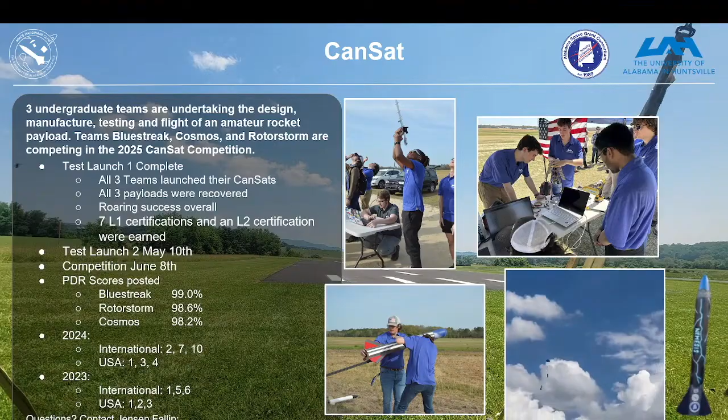They're working on this really cool subsonic automated plane. It's called SPAROW, and they're working on their first working prototype.

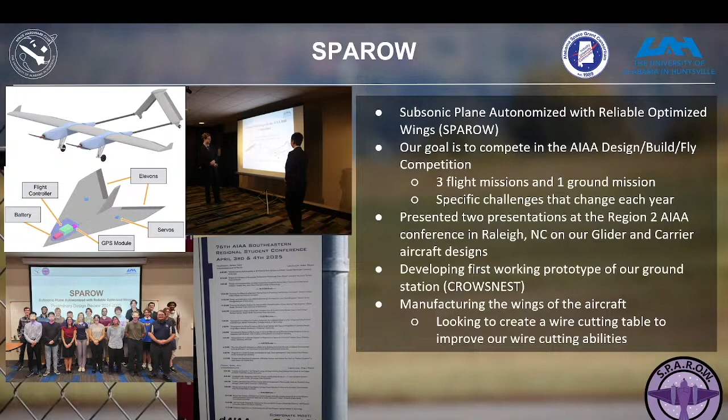They're actually doing a competition, manufacturing the wings of the aircraft, and looking to do a wire cutting table to improve their abilities, but they're also working on all these little drone projects too.

This is called the Space Hardware Club BalloonSat program. One of them we did from Antarctica - I showed you those slides last year. So that's what it's like down at the bottom to launch a balloon in Antarctica. You don't have to worry about trees, but it is a little bit cold. That was the warmest day of the year we launched there, and it was 28 degrees.

Above zero. Yes, yes. This is the HAVOC payload - I'll talk a little bit about that. It's called High Altitude Visual Orientation Control. The HAVOC project has the goal of developing and researching hardware capable of stabilizing its direction and rotational velocity within the stratosphere, and they want to enable that for stable video.

How many of you attended GPSL two years ago in Huntsville? They actually showed this payload operating. They would spin it and it would immediately snap back into place. It's really, really a cool system.

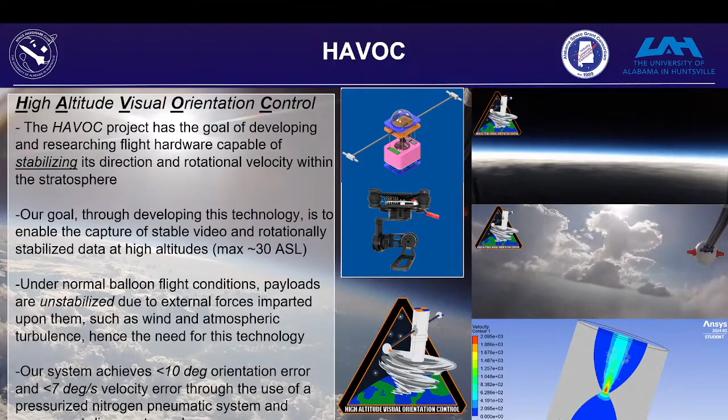Under normal flight conditions, they were able to achieve a less than 10 degree orientation error and less than 7 degrees per second velocity error through the use of a pressurized nitrogen pneumatic system and convergent to divergent nozzles. If you remember the Gemini program, when they did spacewalks they had a little air jet control - it's handled in kind of a similar manner, and it really works pretty well.

Now this is one they're currently working on. How many of you have launched a balloon that came down in a 1,000-acre field with one tree in the middle of it, and it lands right on top of that tree? Wouldn't it be great to avoid that tree? Or the mountain? Or a lake? Or someplace that's pretty hazardous?

Like one place I landed in was a swamp in South Carolina. Before I walked in there, they warned me: before you go in, I want to warn you, it's filled with alligators. My payload's still in there - so I did not go after that one.

And we had one balloon land in Texas that I was riding along with, and it was way up in a tree in a private hunting preserve. Had we had the ability to steer it, we could have avoided that preserve. But instead, we had some discussion - well, it's right on the edge, let's go get it. I think we should probably ask permission first.

Well, the guy came in his utility vehicle with a big shotgun rifle in the back and said, I can get that down for you. We went out there in his utility vehicle, he pointed that rifle, and in one shot - the payload string was 100 feet high - he was able to sever that line with the first shot, and everything came down. So it was a very good thing we asked permission first.

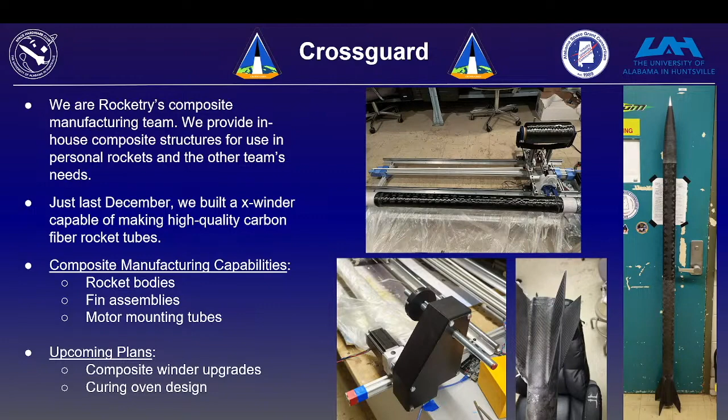They also have a rocketry program, and they do a number of competitions with various goals. You can see there's all kinds of stuff they've been doing, and they actually get their amateur rocket certification through this program. They're working on making different composite materials for rocket bodies, fin assemblies, and the motor mounting tubes, so they're learning how to do composites as well.

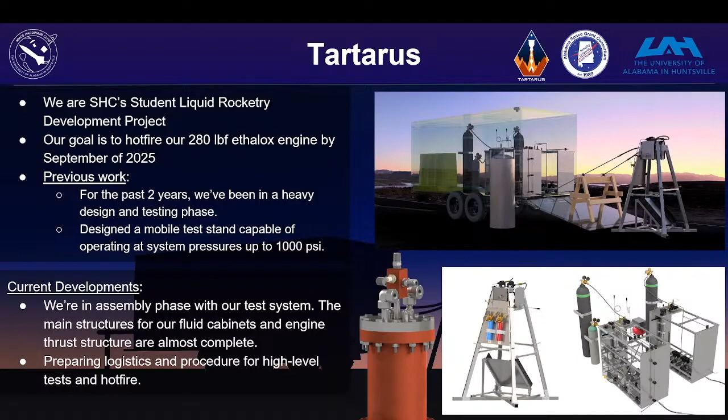And there is a rocketry project for the Spaceport America Cup, called Elysium. They have to build a rocket that will go to 10,000 feet, but you cannot go over 10,000 feet - so they have to get as close to it as possible without going over. They're also working on a liquid rocket engine project as well. So it's a very ambitious group.

Any questions on activities of the Space Hardware Club? Yes, Jim - how do they finance this? Space grant, NASA space grant, and private funding.

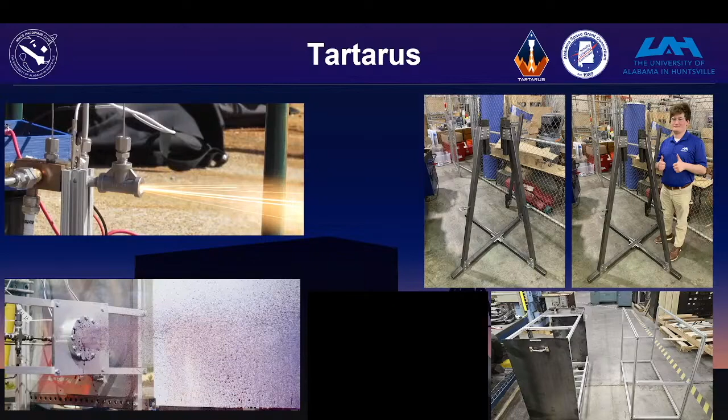On the solar balloons, is there any validity to doing a hybrid where you have enough gas to kind of keep you aloft - does that have any advantages? That's a good question, that might be a really interesting way to do it - just be neutrally buoyant and allow for something like that. Typically these are not sealed off, not super pressure. What I have heard is that if you use pure black trash bag material, when it gets up to 60,000 feet it actually melts the material - there's that much heat it collects. So it's better to have polyethylene, high quality like broadcloth, with carbon black on the inside - that works a little better. But there's all kinds of people flying these, just a tube of trash bags or big leaf bags taped together will take off.

And actually carry enough to carry a small payload. With that, I'm going to go to the next talk. Yeah, you can just escape out of that, and the other one I think is already loaded.

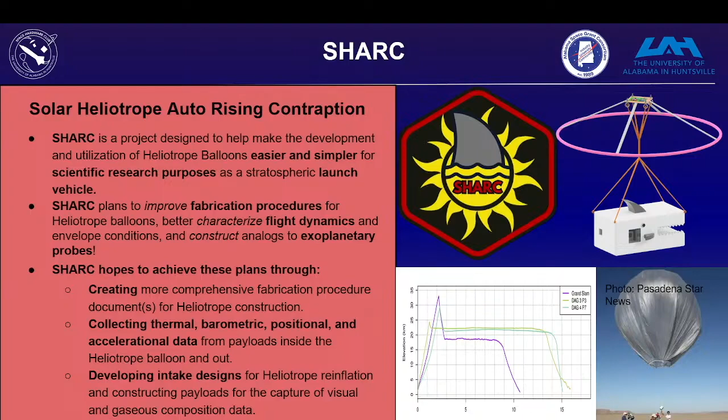Hey Bill, what is carbon black and where can I buy it? I'm not sure where to buy it, but maybe a paint store. It's lamp black or carbon black, real fine carbon powder. They probably use it for different paints.

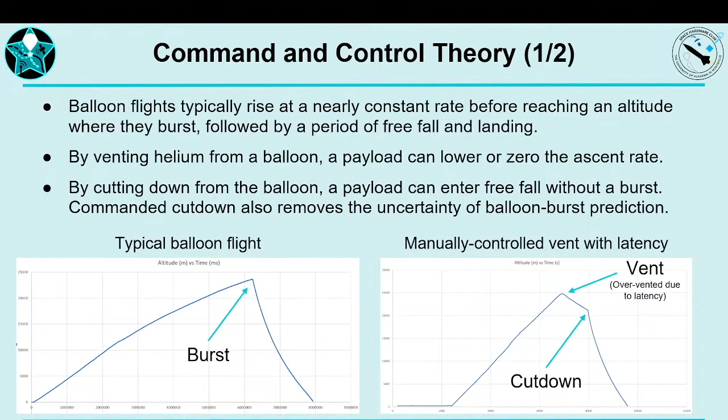So they were testing it by venting until they start coming down, and then after a certain point, they hit a cut down to come down in a normal manner. And it does affect where you're going to land, so you can actually choose your landing site by doing this method. You can control the landing zone with some degree of accuracy.

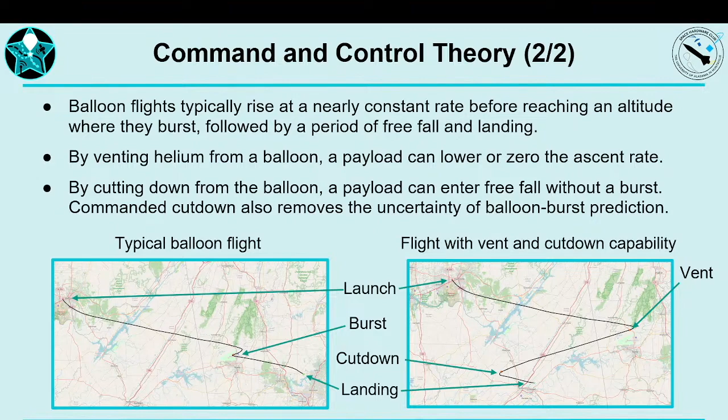So in other words, instead of just cutting it down and hoping for the best, you can give yourself some latency time to choose a good landing spot and have it drift far enough to really improve your chances.

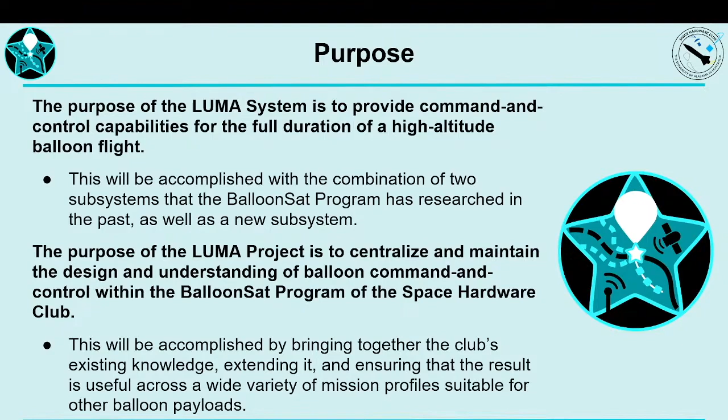So they want to centralize and maintain the design of their communications for the full duration of how people are going to fly it.

And eventually, we're going to be bringing down the balloon completely intact with a final adjustment using a vented ducted fan system. So you'll end up with the balloon. I don't know if you could reuse it much after that, but it's possible.

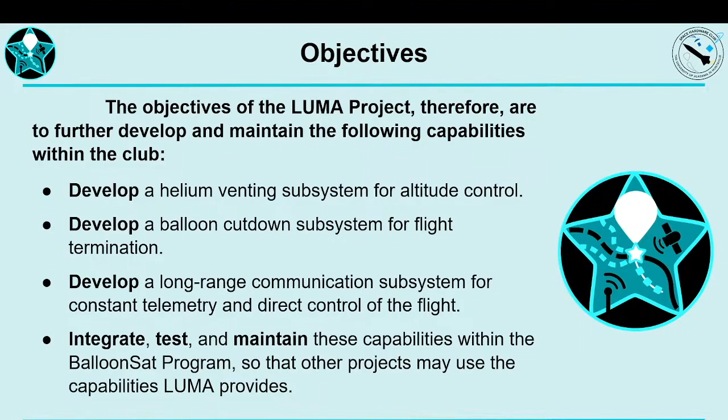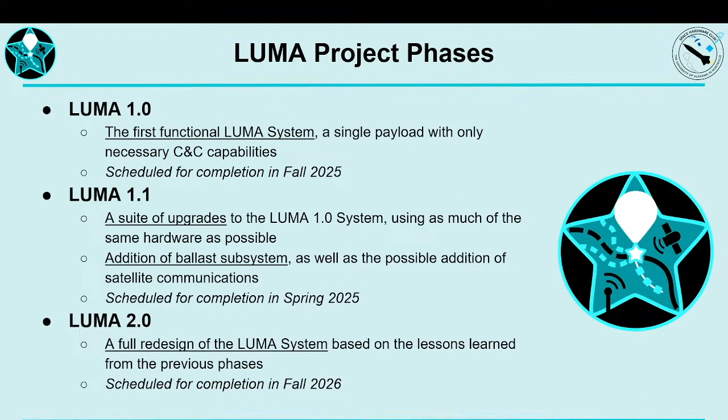So we've got basically the experiment and the cut down system. There's a lot of slides here, so given the time allotted, I'm going to skip through some of these.

So this is what their plan is, to let it go up normal, float, and then cut down.

This is their first smart balloon, the one I told you about that actually took itself off. It was pretty cool to watch because it just sat there venting liquid out of it, which was alcohol. They had a container of alcohol and it just started dropping alcohol until it actually took off. You could just sit there and watch it, and this balloon actually launched itself.

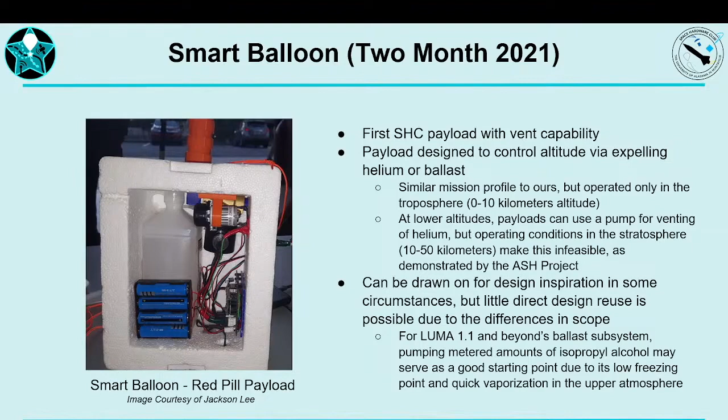So first, they used a drop designated release of payload, DROP, I like that acronym, and they flew this several times successfully.

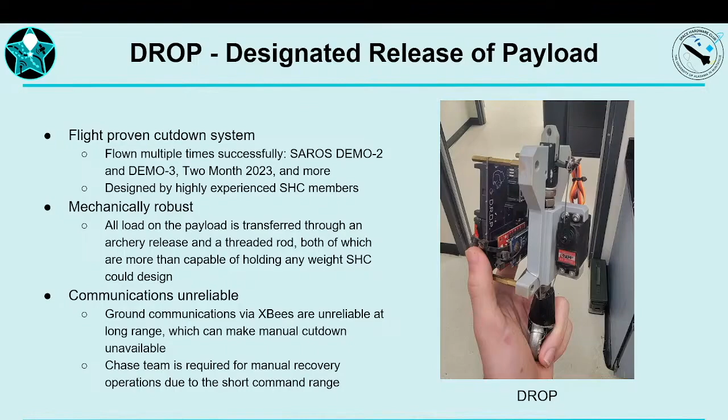And they used some XBees. I've actually had a 915 megahertz, 100 milliwatt XBee, and I communicated directly to a balloon 20 miles away. It is possible to do with high gain antennas. That's a 915 megahertz system.

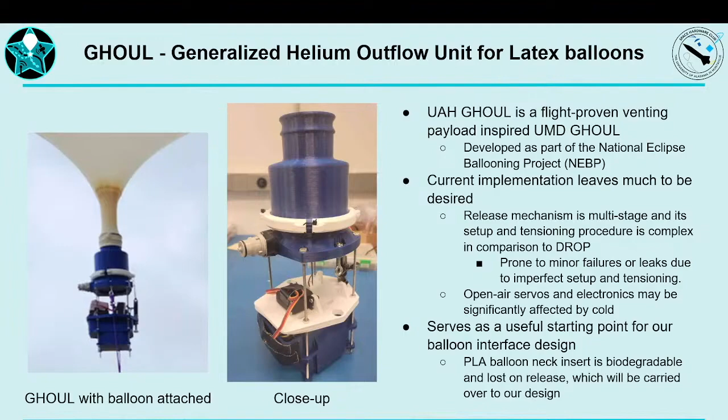So they've got this helium outflow unit. It's a vent that was developed as part of the Eclipse ballooning project. It looks complicated, but it's actually pretty robust in how it works. One of the problems you have is getting the lifting gas out in time before the balloon bursts.

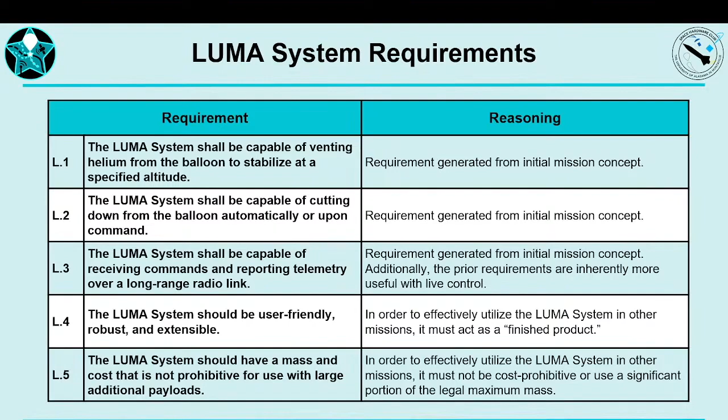And when you get up high enough, if you get it too high, it's hard to get the helium gas out. I think it's right around 26 kilometers where you're really going to have trouble getting enough helium vented to stop the ascent. So a lot of these flights, we did these tests at lower altitude.

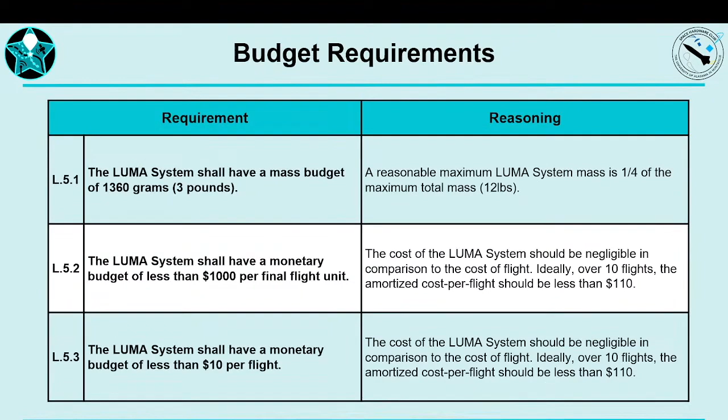Okay, so here's an example of the payload design. The core serves as the brain of the payload. They have a primary flight control unit which allows for the venting of the balloon, geofence flight termination, and they had the LRC communicate with the ground station to relay flight data and updates to the flight profile. You could actually send a different flight cut-down profile directly to it, rather than have it go with the profile that was loaded in the machine.

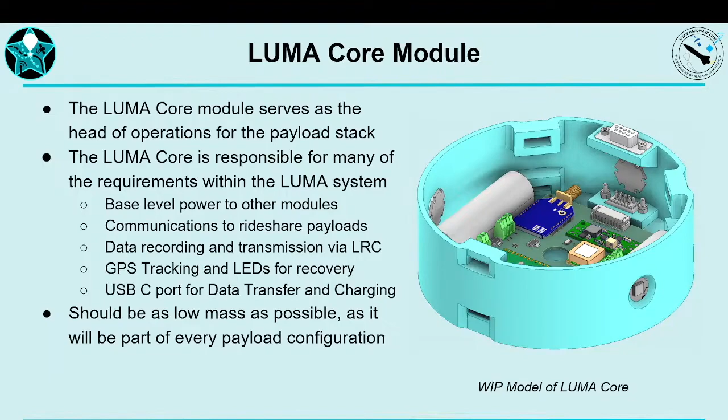There's an example. You can actually see one of the XBee modules that communicates between the modules. The XBees work pretty well for inter-payload communications. But like I said, you can get some pretty serious range on them.

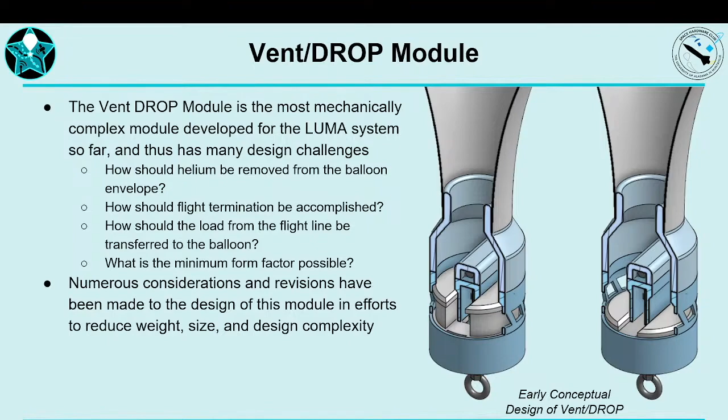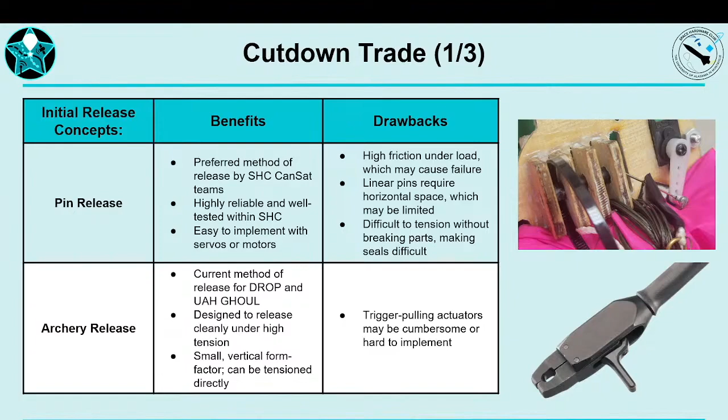So this is another view of the vent drop system. How many of you have used the archery release as a drop cut-down mechanism? Has anybody used that? It actually works pretty well. That's a standard archery release, and they incorporate that into their cut-down mechanism.

And there it is. The jaws hold on to the top payload, and then we have a servo come down and flip the trigger. There's not a lot of pressure needed on the trigger, and it'll open those jaws. It seems pretty reliable, and they've had good luck with this.

It's worked in several of their flights that they were testing for this release mechanism. What operates the servo? That's commanded by the uplink command from the XBees and the flight computer. Sometimes it's just based on an altitude limit that they preset.

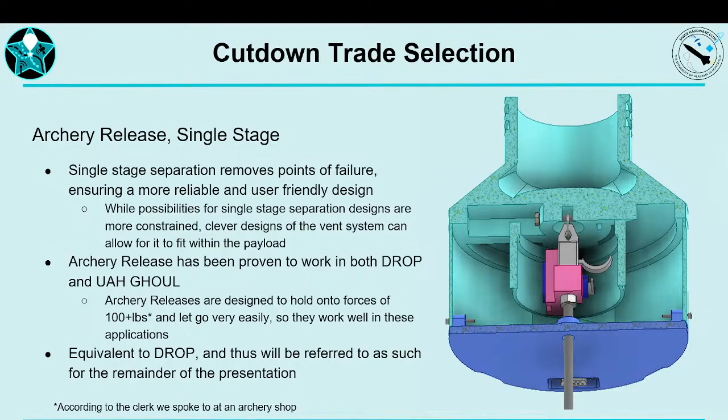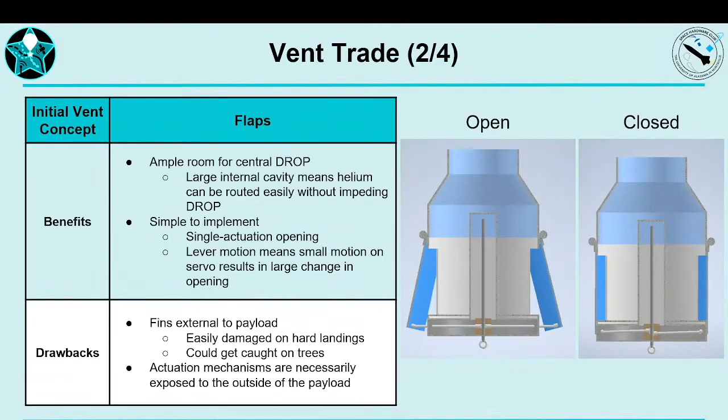Now this is the ventilation system that they're working on. They have open and closed flaps. These are a couple of the concepts that they worked on. They had a helical venting arrangement, a flap arrangement, and a plunger arrangement. So these are all the ones you can see.

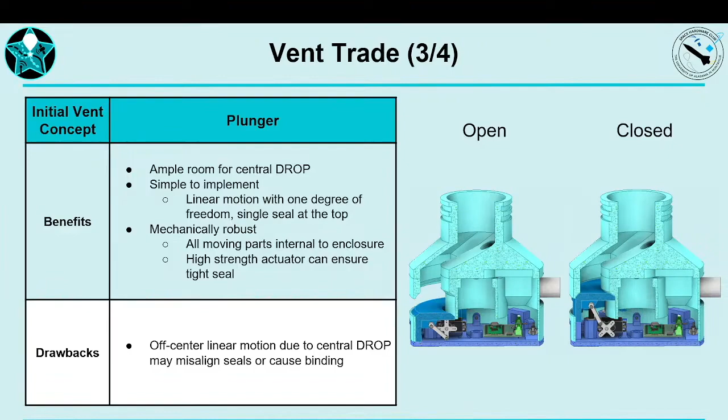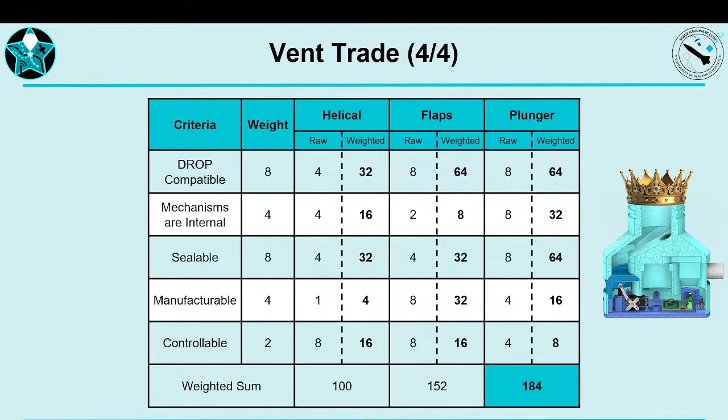They do things like this in this club. This is what you can do in industry when you're trading off different designs. They really weight everything and figure out which gets the best score.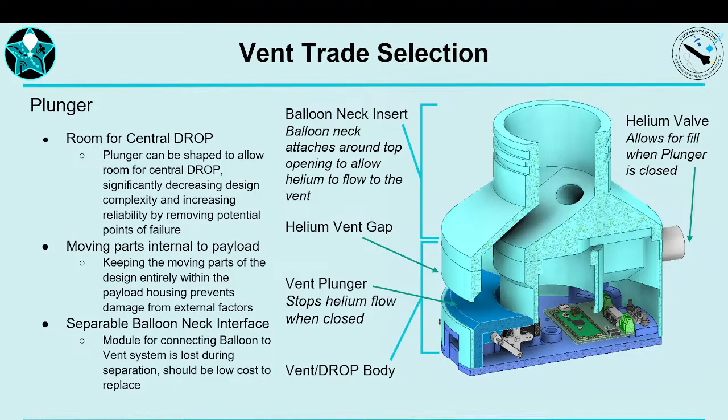So this is the plunger outfit. Looks like they have a Raspberry Pi Pico in there, controlling a servo, which is then controlled from the uplink commands and the flight computer that's hooked into it. And that, of course, ties into the bottom of the neck of the balloon.

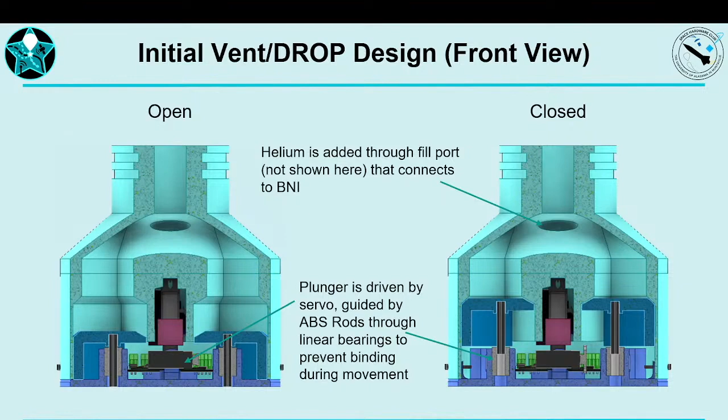And these are the dimensions of that. You can see the servo mechanism. All of this is 3D printed. And then it hooks into the release mechanism with that archery release.

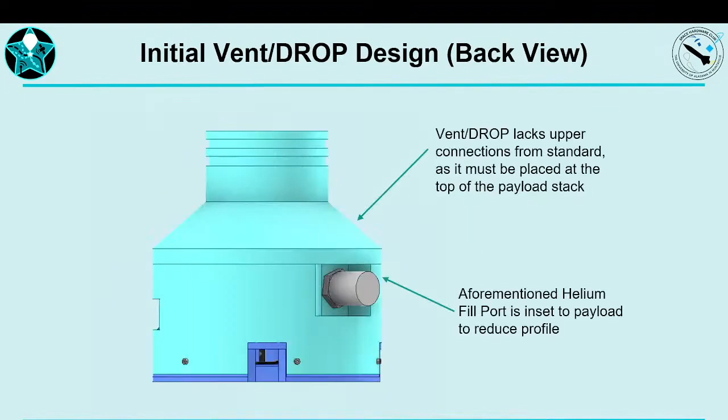And there you go, that's open on the left and closed on the right, and then the release is in the middle. So it's a pretty neat little system that they've developed here. That just hooks onto your balloon, your flight train comes down, and then you can cut away, or you can vent it until the whole thing comes down.

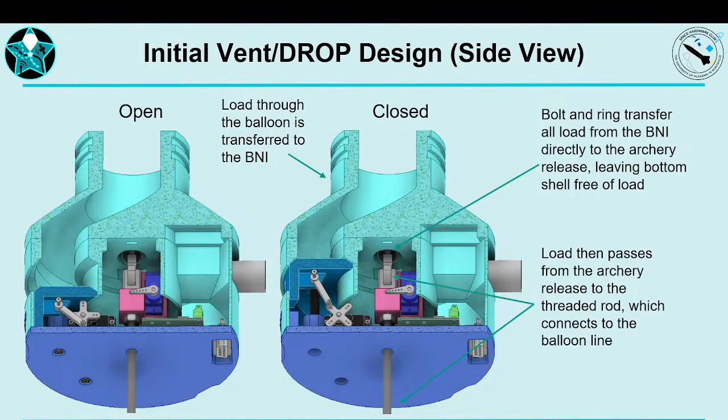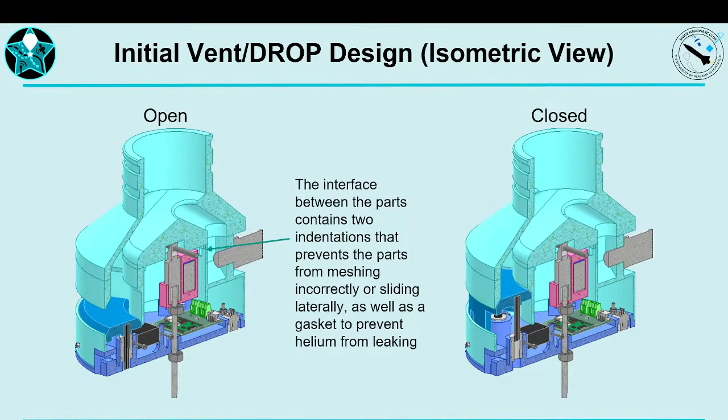Here's another view of it, and here's a cutaway breakout of how everything assembles.

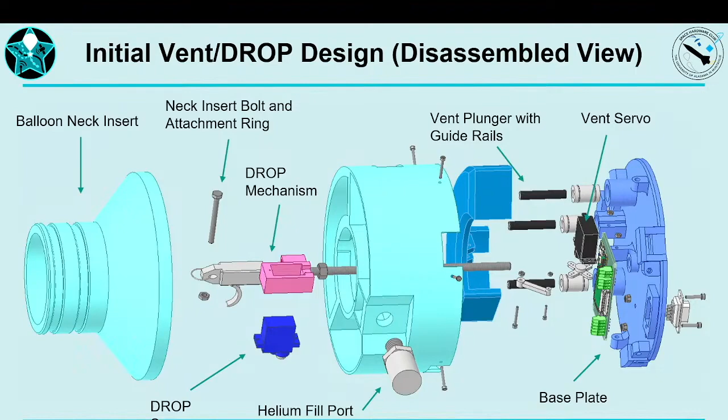So how many of you have access to a 3D printer? You can make your own. I'll see if they can offer some STL files for these. This is the separated view.

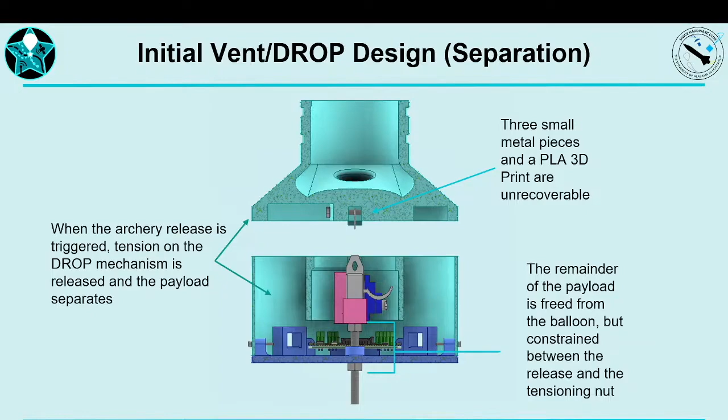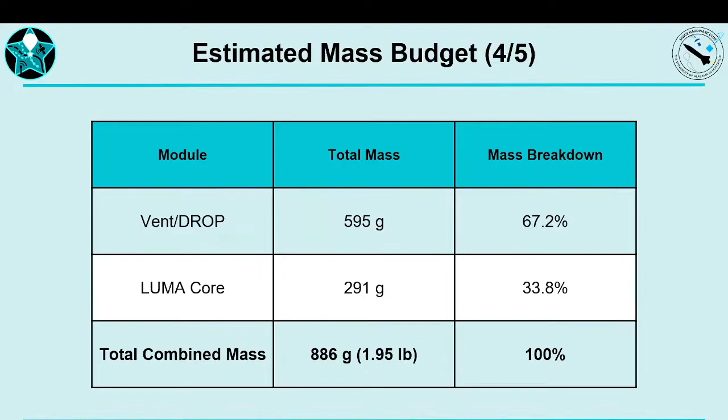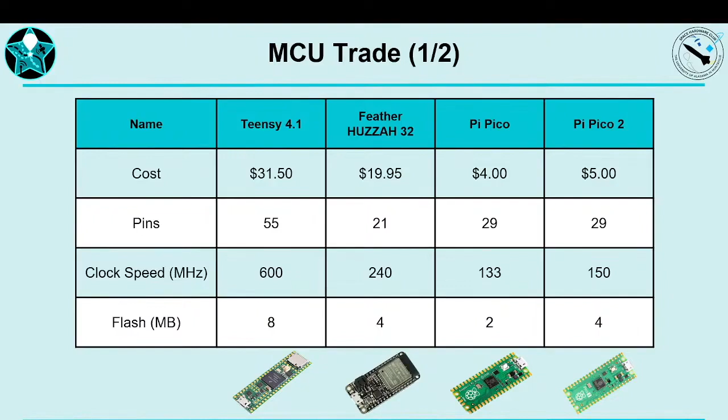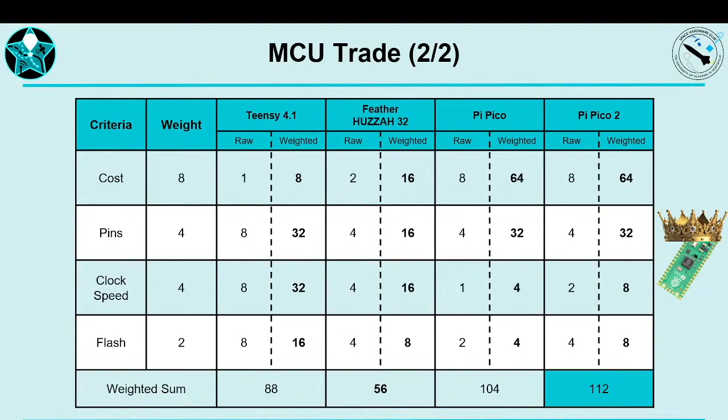And these are some of the microcontrollers they were looking at, to give you an idea of the comparison between the Pi Pico and all these other little smaller computers. They liked the Pi Pico 2 the best. It is a very capable board, I have to say, and for the price, you can't beat it.

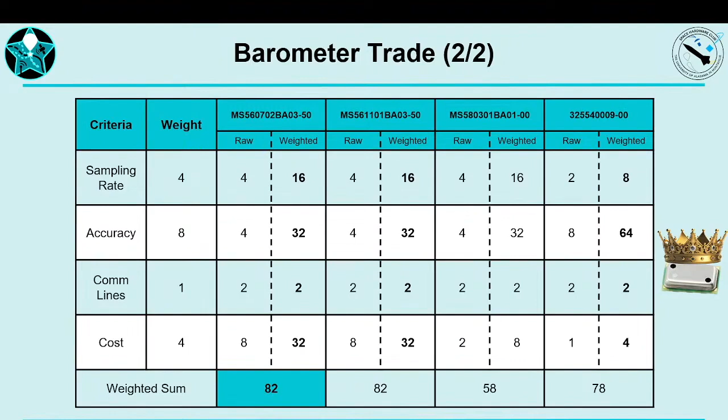And they did a study of barometer chips and looked at the differences. These are some that they looked at. I've flown the 5611s, which work up to 10 millibars or so, but they're a little trickier to work with. They seem to like the MS5607, the one on the left there.

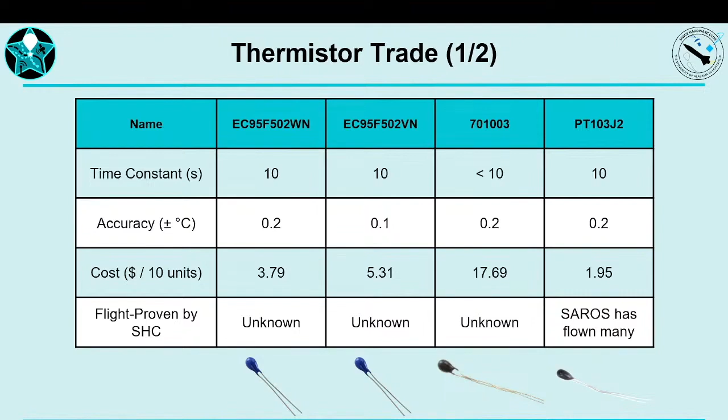And they flew thermistors, so they've gone through all these to check out the most accurate methods. They like that thermistor. You can see how they do the trade study on all these.

Now I'm going to have to throw my own in here, that Chinese ATGM336H is my favorite. So the startup spike's pretty rough. It is, it does have a very brief, very high, like 200 milliamp spike. So that's important to have a super cap on the system for just that. I had to add an extra 47 micro next to it just to absorb it, because it was resetting my processor even with the super cap.

You put a 47 micro cap right next to it? Yeah, on the 3-volt line. That's good to know. And I used a ceramic 0805 or whatever. It worked just fine. It basically fit in place of a 0.1 microfarad.

That's a good hint. For those that didn't hear Zach, when you're using the ATGM336H GPS, it does have an initial milliseconds 200 milliamp direct power surge, and he put a 47 micro capacitor across the power lead for that, in addition to the super caps.

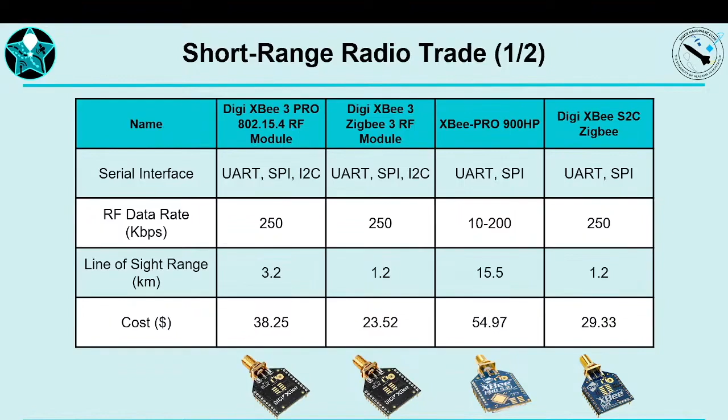But for closer distances on a payload string, you could use any of these. Of course, they like that one.

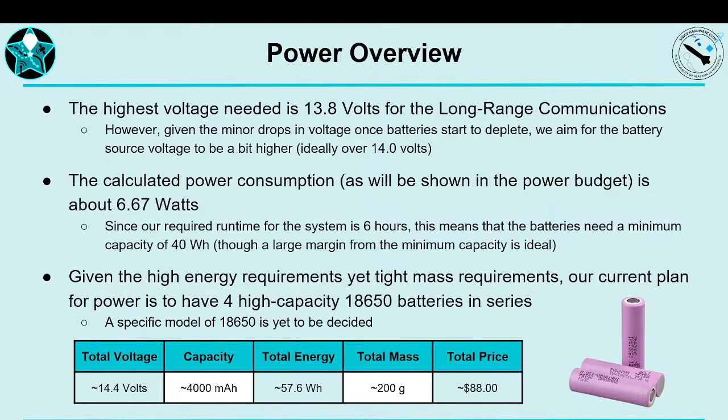So they pretty much, let's see, they need 13.8 volts for their comm system. How many of you have been flying the 18650 batteries? Have you had any good luck with those? Anybody flying those? They're rechargeable and high power, but I don't know quite how they do in low temperature.

I think that's pretty much it. I just wanted to show you some of the block diagrams that they use for their radio. They're using the DRA-818, which is a VHF chip. It's a transceiver chip that's really cool, with the Raspberry Pi Pico to control it. And it's a 2-meter FM module. I've seen people make APRS trackers out of a microcontroller with one of those chips.

They're a half watt, or half or one watt. Either one watt or half watt. That's what I put on the Pico, but I just got done flying the SA818 because it supposedly has an extra half volt of headroom. It can go up to 5 volts instead of 4.5. Oh cool, okay, the SA818. Yeah, otherwise it's exactly the same chip.

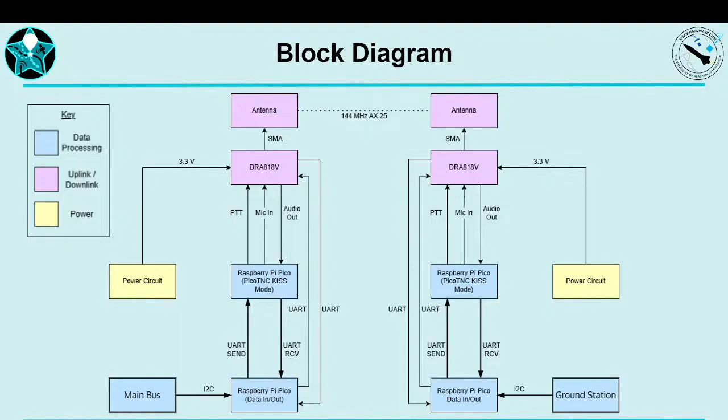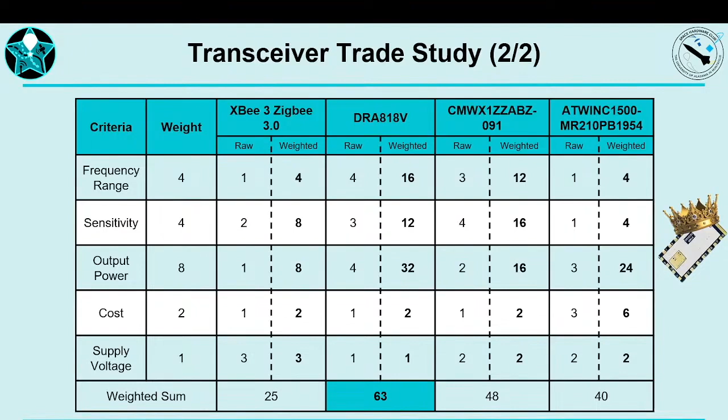Okay, and they like the DRA-818 the best. So anyways, there's an actual—oops, I'm getting feedback here—that's the 818V and the Raspberry Pi Pico combination that they're using for their data transmission.

Any other hints or kinks for using that SA818? You need to put output filtering on it because it doesn't comply otherwise. Otherwise it just kind of works. They're easy to hand solder, relatively easy. And they're cheap, about $12, $8, somewhere in there. So between that combination, you've got a little cheap setup.